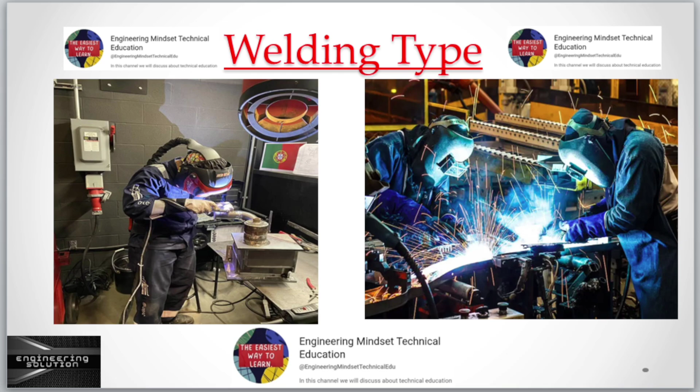Welding is a joining process of materials. By applying heat and pressure to the materials being joined and to the filler material, a weld pool is created, and it forms a strong joint when it cools.

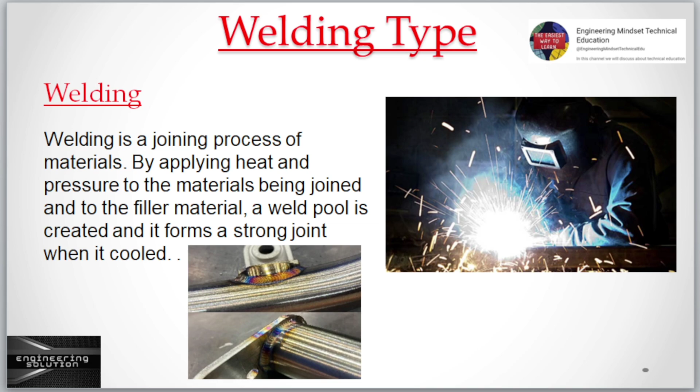Arc welding. Arc welding is the formation of a welding arc between the electrode and the material being welded, usually metal, with the usage of a power supply and electrodes.

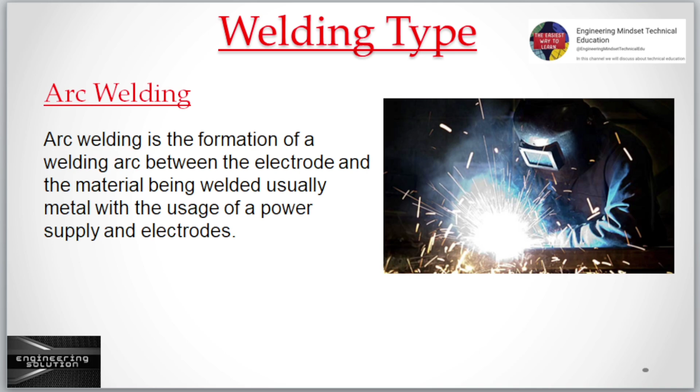Shielded metal arc welding. The electrode is coated in flux. That flux is then used to lay the weld. This process is generally called stick welding.

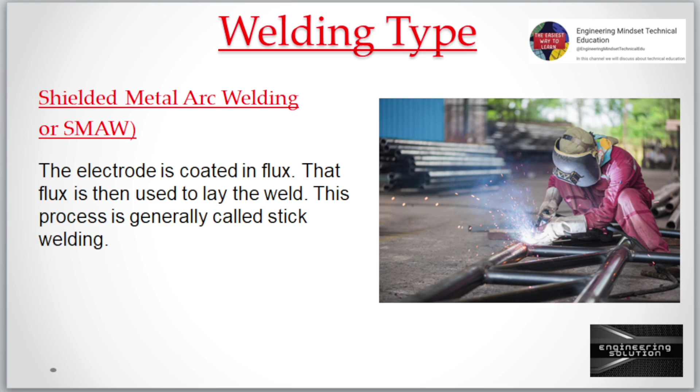MIG welding. The process is boiling down to combining two pieces of metal together with a wire. After that, the wire passes through the welding stick that is shielded by an inert gas.

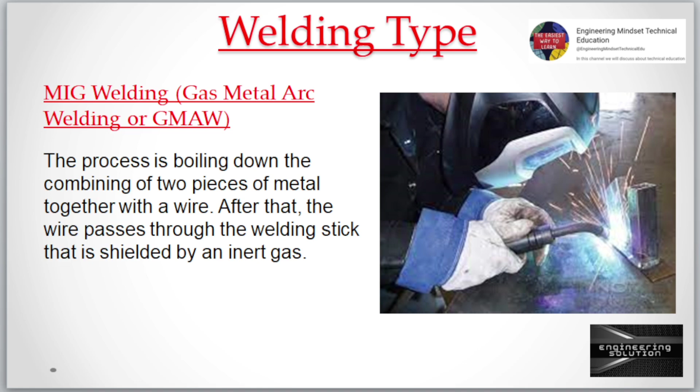Flux cored arc welding. Flux cored arc welding uses a special wire filled with flux and shielding gas.

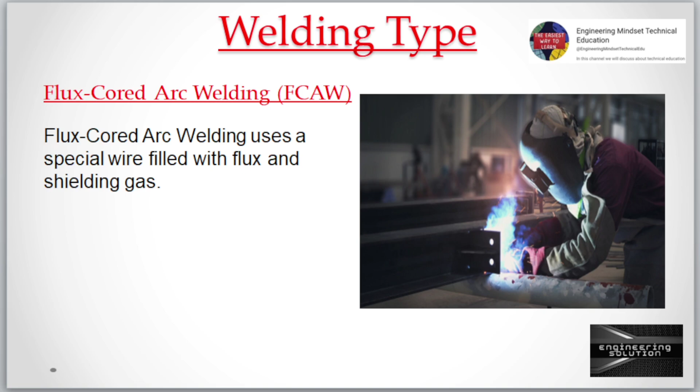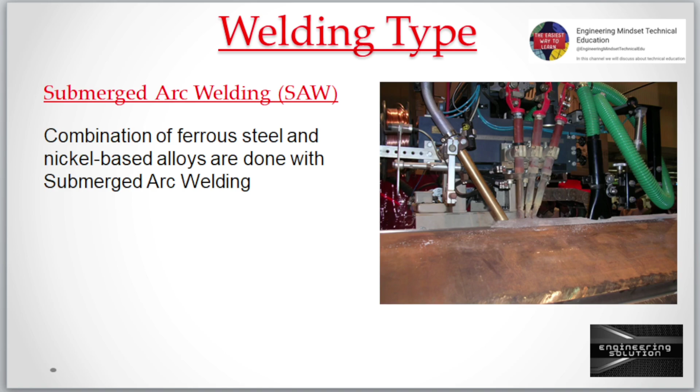Submerged arc welding. Combination of ferrous steel and nickel-based alloys are done with submerged arc welding.